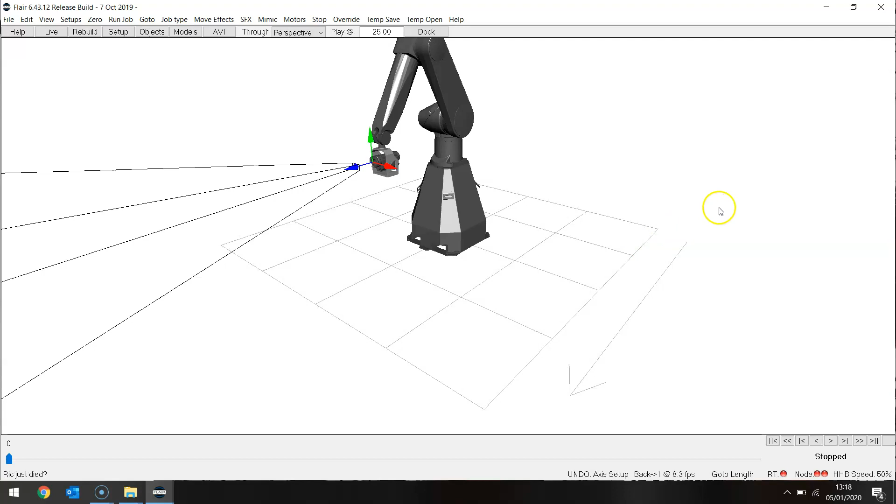If we have a look at our rig model, there it is, that many of you have. Here we're going to switch our roll moves straight to roll up.

Because we are going to be importing a 3-node camera, I want to make sure that the third node, the up, is actually imported. At the moment we have priority to axis positions, but that may change as soon as we do an import because we'll be importing Cartesians.

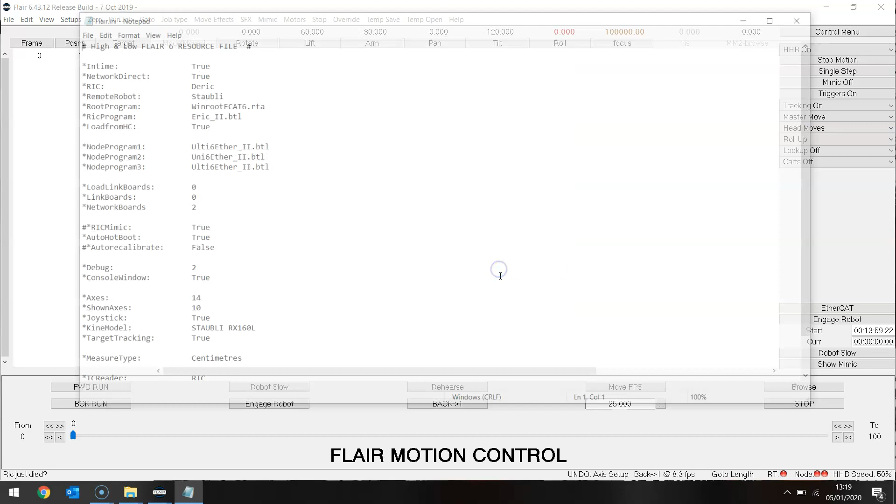I'm just checking here that this particular version I'm using has a license set for FBX. There we are, we have an import license there. I can have a look at my ini file and see film box is true, that means FBX will work.

If I want to, I can also look at my export screen and see that I could export in FBX 1-node, 2-node or 3-node. That illustrates to me that this version is fully licensed to use FBX.

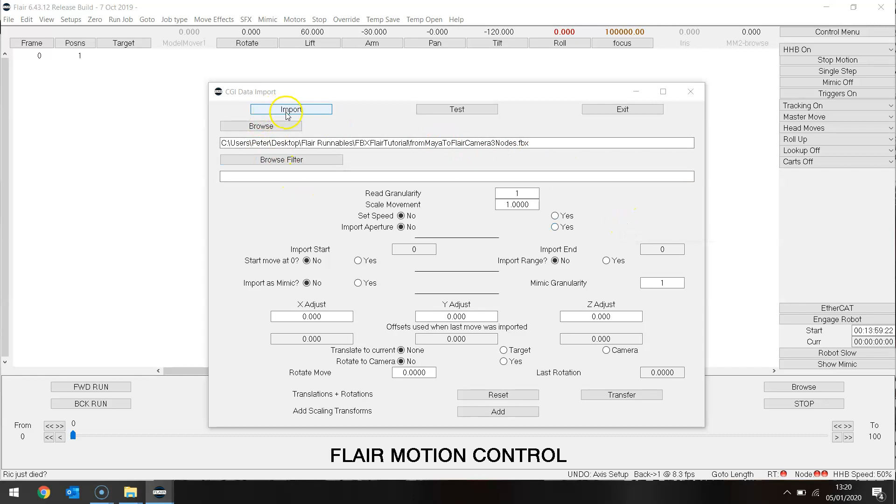So here I'm now going to import. I'm going to find first of all my 3-node file that I imported before. There we are. I'm not going to change any of these now, I'm going to import that, select the 3-node camera, and there I have an imported file for the 3-node.

If I look at my rig model - don't want that warning anymore - I have the blue path of the camera, the green path of the roll up, and the red path of the target distance.

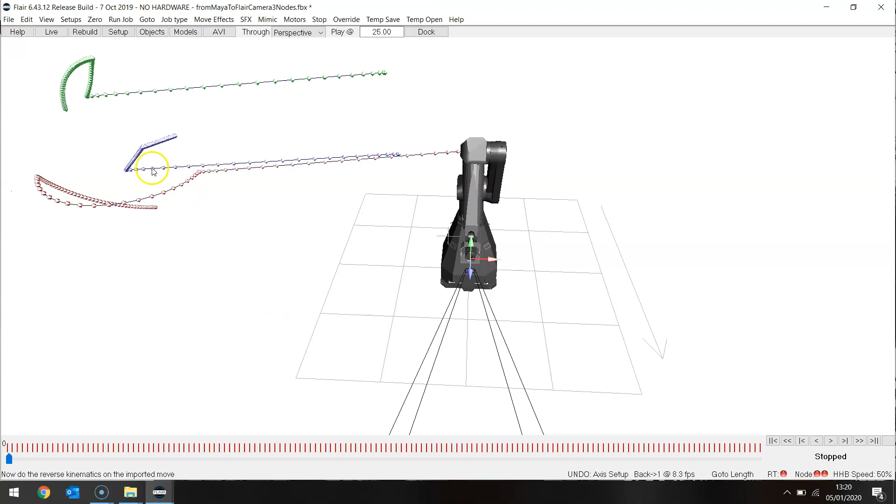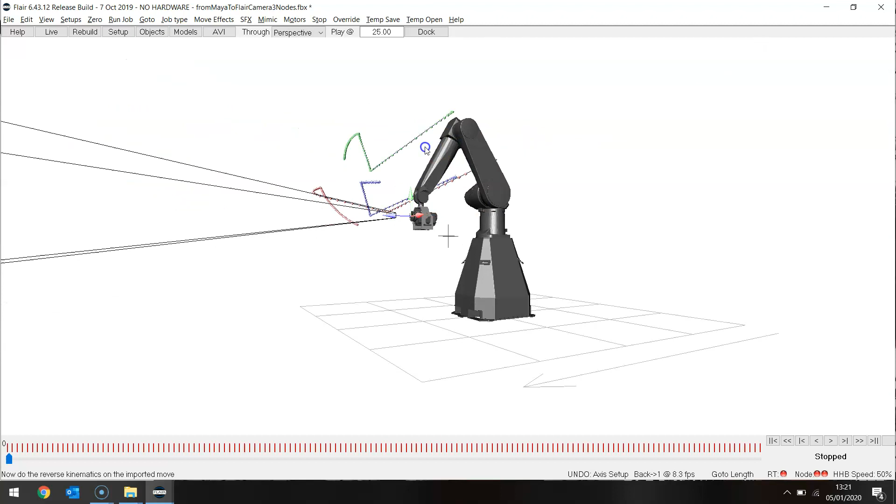So in order to fit that onto my pedestal, I can see that I obviously need to move in Y, probably by about 3 meters. I need to move in X, and I may need to move down a little in Z so as not to get a job that goes through tilt 90.

So I'm going to put those straight in, see if I can put those offsets in. X, let's go 1 meter. Y, let's go 3 meters. Z, I'm going to go down by half a meter.

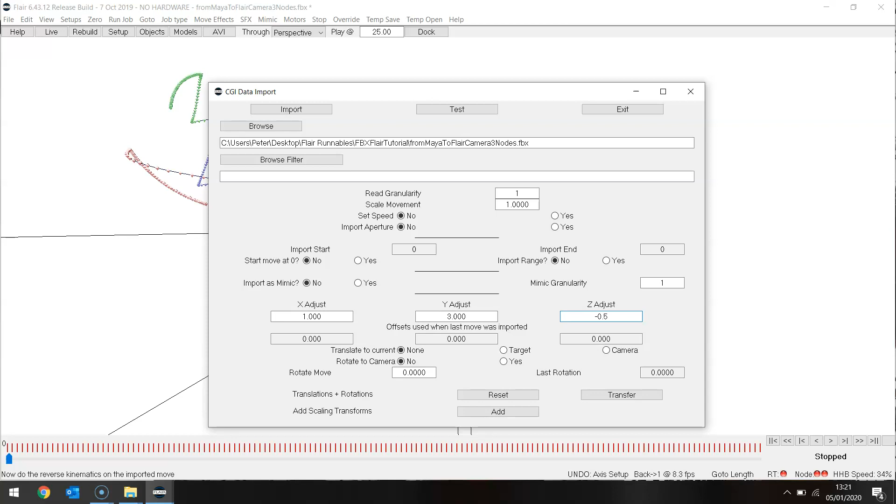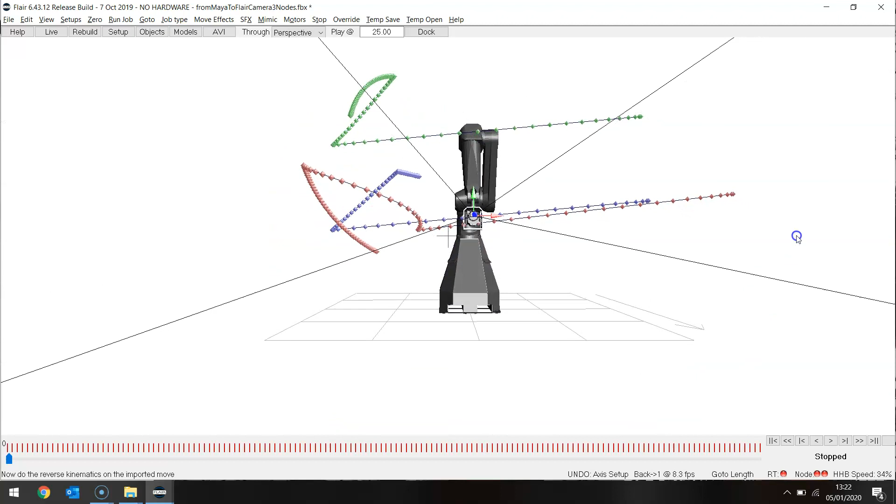Import again, and take a look at that. There I am, reasonably within range again, though I may have to shift that around slightly in order to get that far end and that point to work properly.

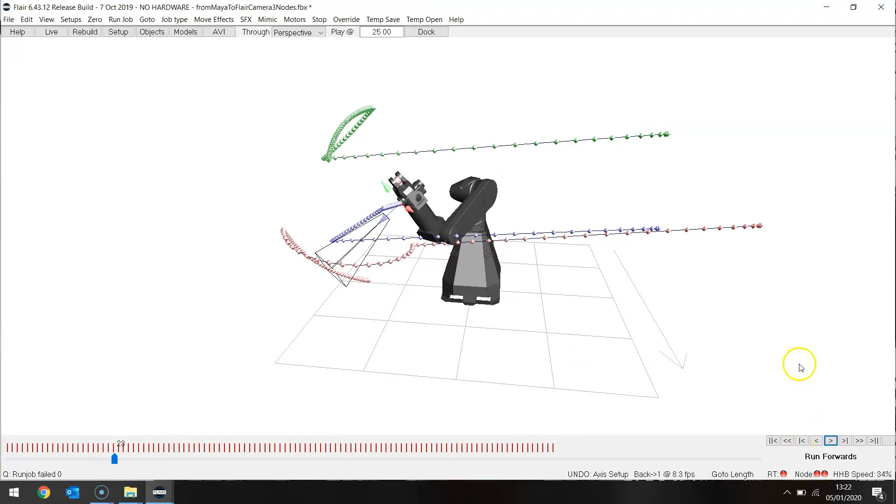If I run this... interesting, because Flair has chosen to fold the arm under in order to do this.

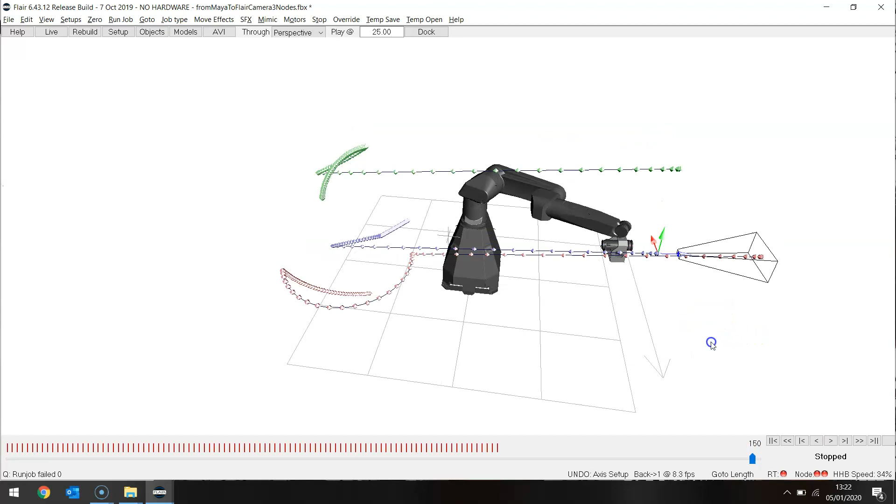There are two solutions to an import here, and the mathematics can select either one of them in order to get the camera in the correct place, and here Flair has chosen to do the one that we really don't want to use. So what I'm going to do to handle that, I could complain to Simon and say, okay, I need this to sort itself out.

But if I go here to my arm and type in 90 minus, it subtracts 90 degrees from all of these, and that should force my rig to go to the other solution. There we are.

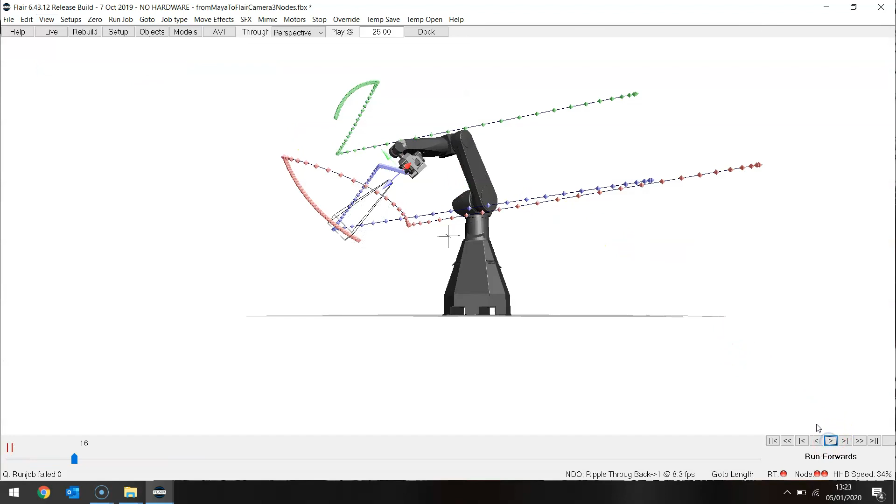So now it's folding over the top. I'm still very close to my extremes. I'm not managing to do that, but I'm getting close to running my move correctly.

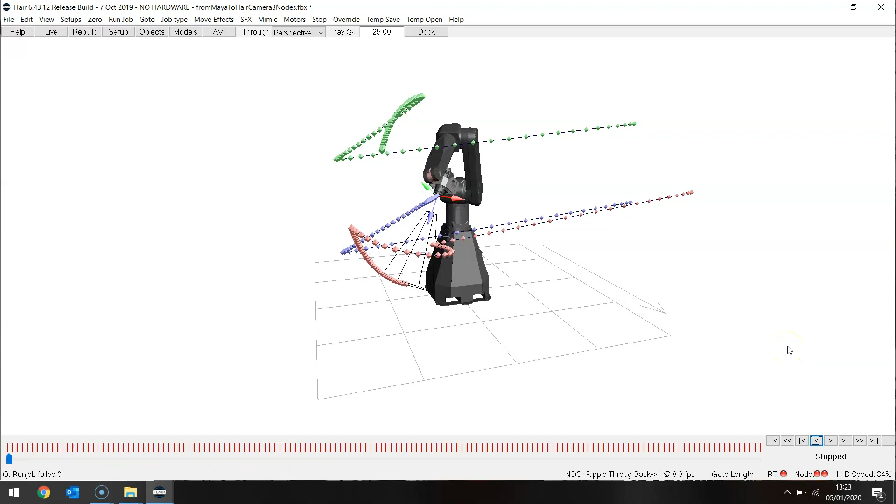I have a problem right at the beginning in that my tilt is quite severely underneath there and is actually hitting, and I am not reaching the end.

So what I'm going to do is use slightly different offsets. I'm going to re-import, bring it closer so I have more reach - 0.5 there - and I'm going to bring it down minus 0.7, and re-import.

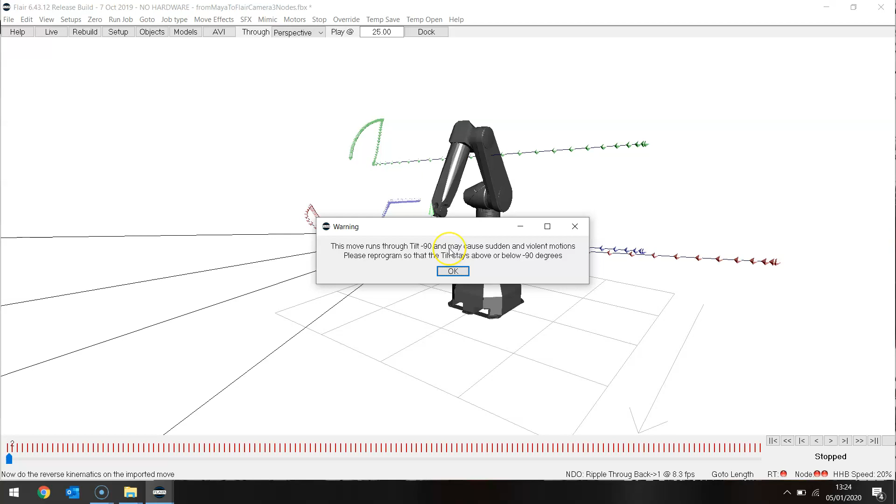Let's have a look at that. Now this is telling me that it runs through tilt minus 90, which is occurring because just there my arm is effectively vertical.

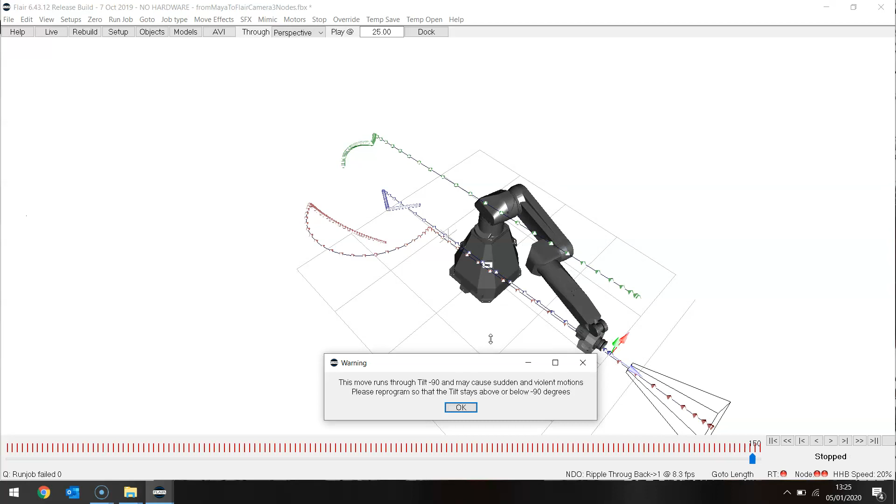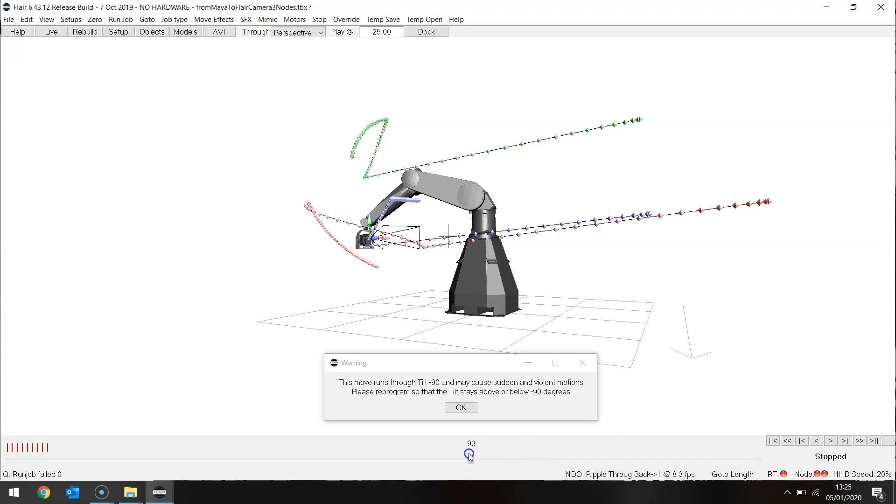I can run it, and in terms of positions, just there I'm not quite reaching. Just there I have room still, and if I carry on back along my line there I'm okay. And in terms of the tilt...

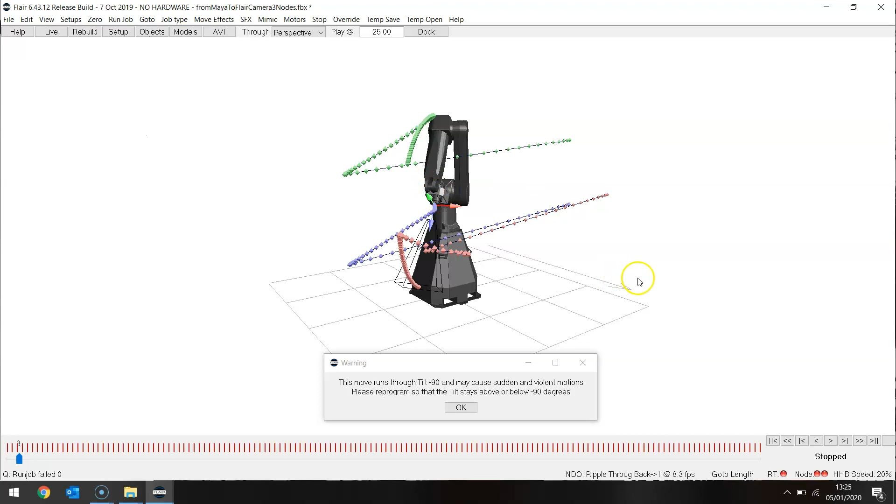My start position is good, and at that start position I don't now have the pink showing that I am over. However, I have a little bit of a problem through the tilt because of the tilt 90.

So what I'm going to do is go back to my import. I'm going to change my 3 meters to 2.9 meters, and change my Z by coming up very slightly, 0.6. See if that changes my tilt 90 problem.

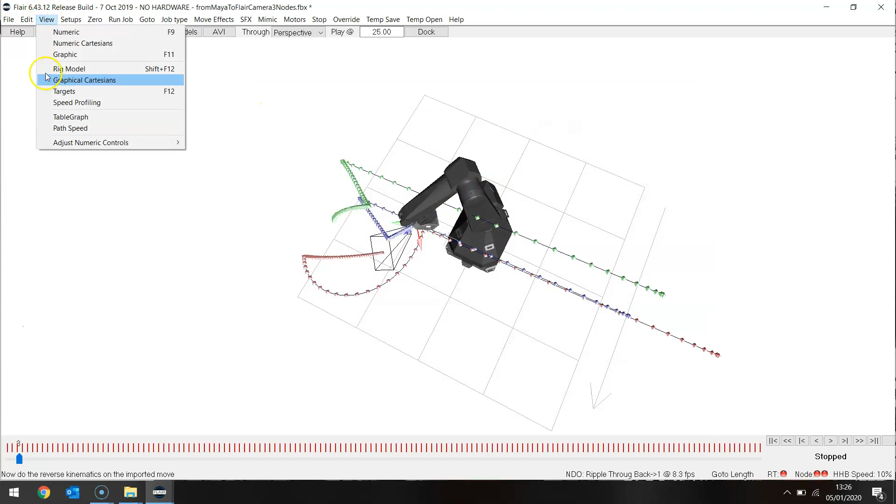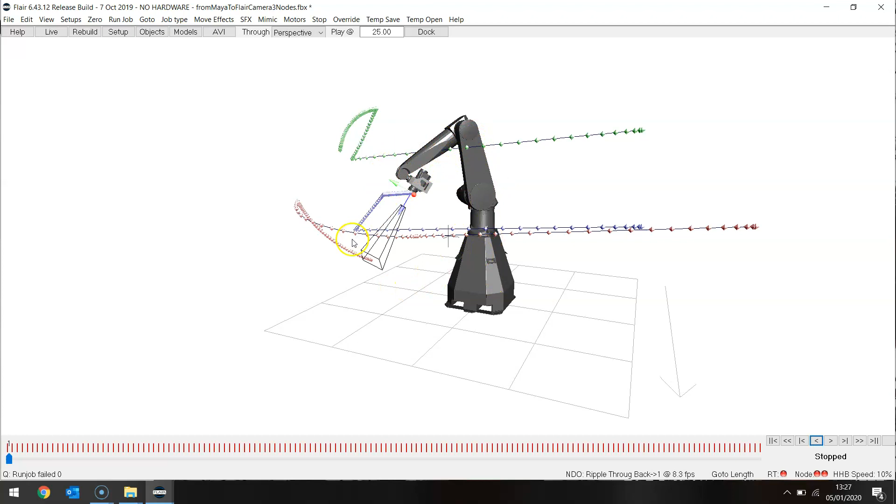And I seem to have reached the end there. That is successfully running the move without any interferences or over limits. So I could run this move. Whether it will run at the speed that the client wants is an entirely different matter.

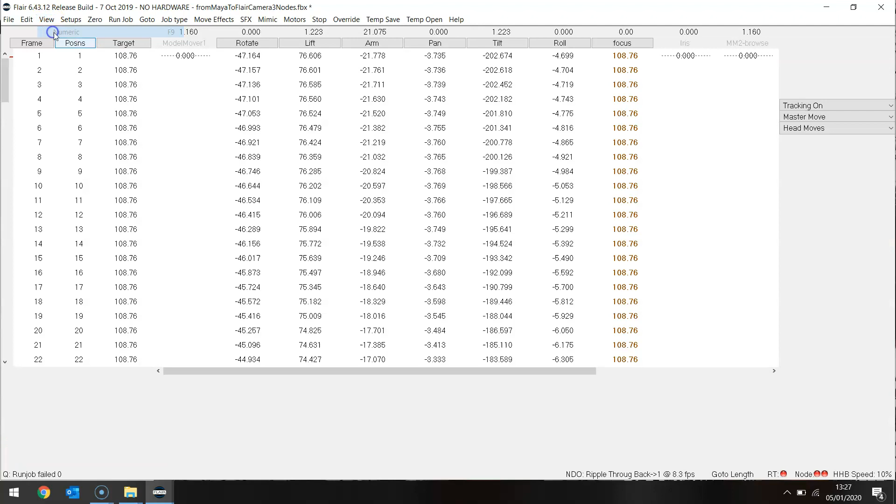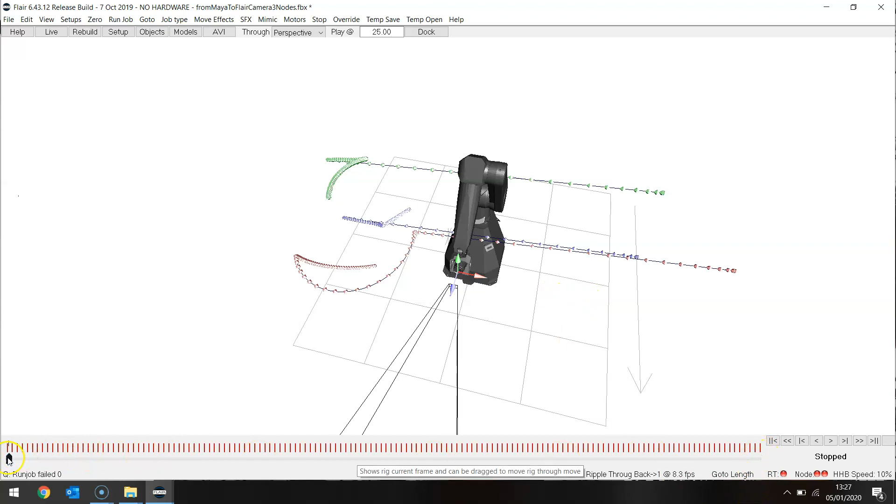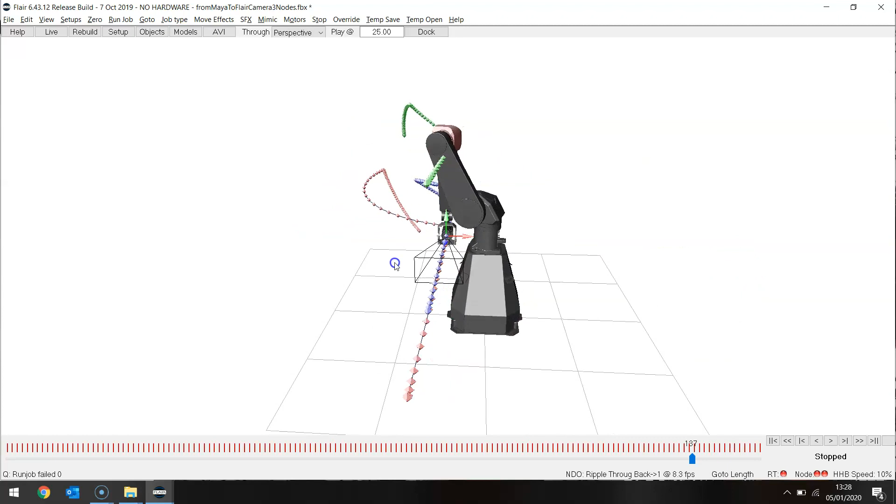So I may need, in actual fact - 137 is there. Aha! Yes, I'm going to bring that slightly further out.

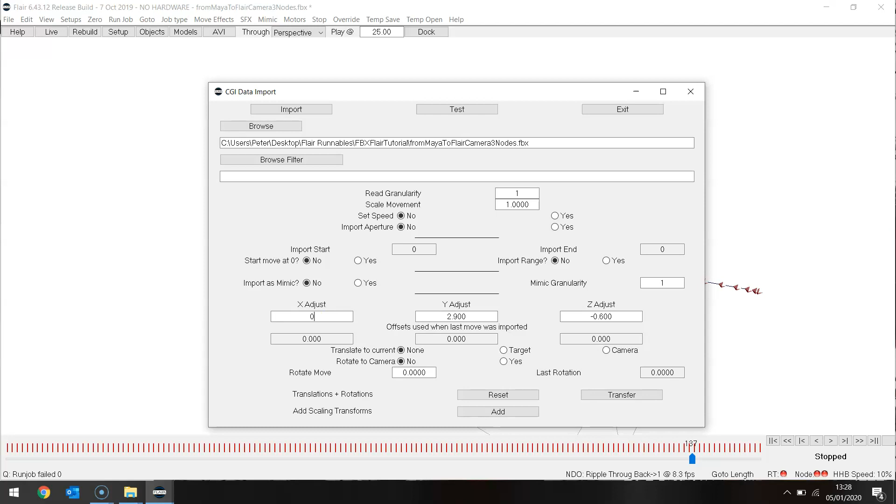By re-importing with a little bit more in X, 0.6. Let's see if that solves that problem.

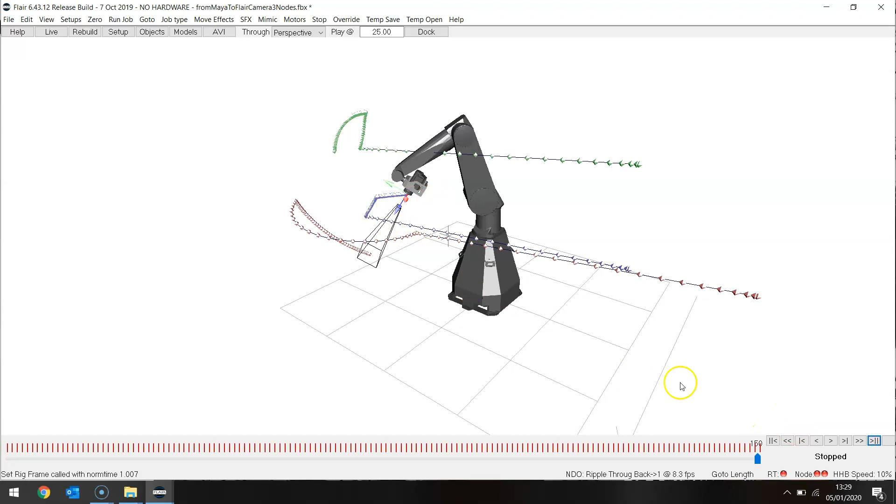An interesting problem in that I have solved the problem there, but I may have gone to the limits on there. Let's have a look and see if I can actually run that.

Says it's too fast. But it's all in this part here.

In order to better run this, I'm actually going to stretch my move slightly using my stretch mode, and I'm going to go from 150 to 180.

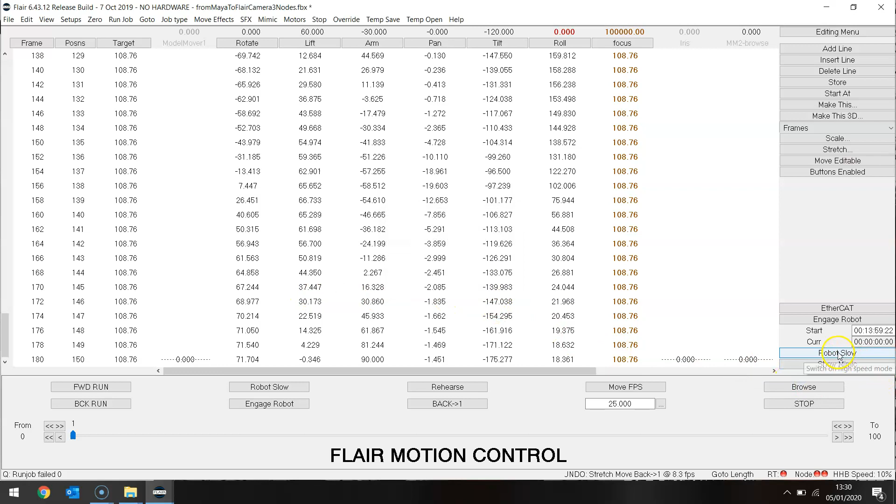And I'm going to use a different number of frames at the end, 180 frames, just to see if that will stretch my move and make it more runnable. Better, but not really viable.

So it looks like in order to run this move successfully, I either need to change the shape of the rig a little, possibly by having a nodal point much further out on my camera, or I need to take this to a rig that is in fact a bolt-on track, and that may well enable me to run it at the sort of speeds I need to.